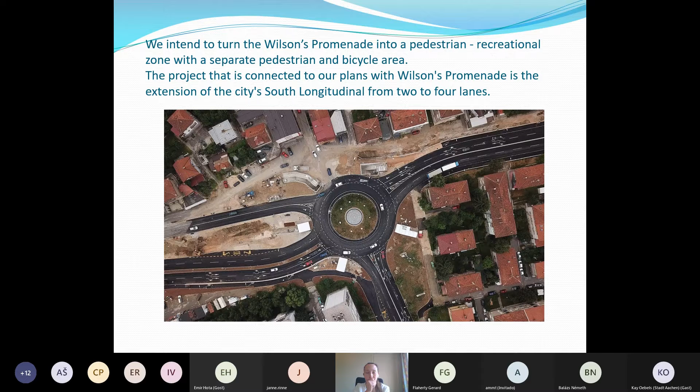We intend to close Wilson's Promenade completely for motor vehicles. The project connected to this plan is the extension of the city's south longitudinal from 2 to 4 lanes, which is already in construction. This project will allow us to completely close Wilson's Promenade, because the road is parallel to this longitudinal.

Trolleybus traffic takes place on this road, and we expect acceleration of public city transport in this part of the city. After completion of the expansion of the complete city longitudinal, we have another road reallocation planned, to establish a priority lane for public transport vehicles.

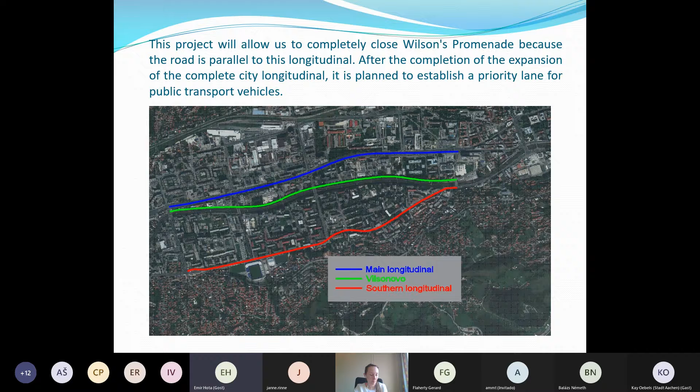We hope that very soon we will have the opportunity to present this important urban mobility project to other cities. This is all for me now. If you have a question, I will answer it. Thank you.

Thank you very much, Emir. Very, very interesting project. And I will now try again to go to Bratislava with Veronica.

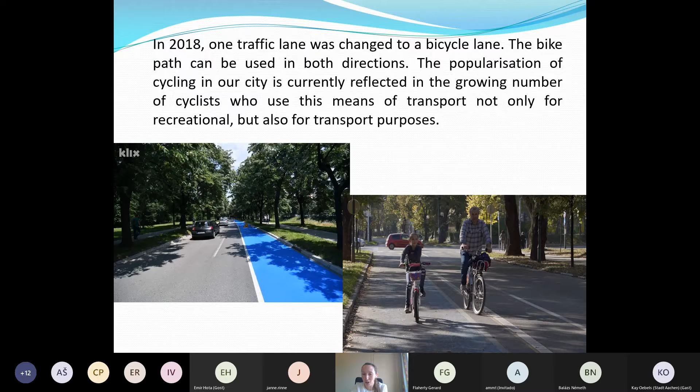Veronica, please unmute yourself. Then we will do a round of questions, and we would like to invite everyone in the room with us to share their story and experiences on road space reallocation from their city. But first, let me go to the beginning of the presentation. Veronica, can you unmute yourself? Can you hear us? Yes, I can hear you. Can you hear me well? Perfect, yes. Okay, I will go back to the beginning of the presentation and give you the floor. Could I then take control of the presentation? Yes, let me arrive at the beginning and then you can take control.

Okay, here you go. Okay, I will try to take control. So you have it? I have it, probably.

Perfect. Okay, so hello again. I am Veronika Vojteková, and I will present a project called Vivid Square, a project about transforming public space in the central part of Bratislava, next to the historical center.

This project began in the context of a neglected public space, because the city didn't have any long-term vision for how to change or develop public spaces in general. Usually their function was reduced to only a transition area.

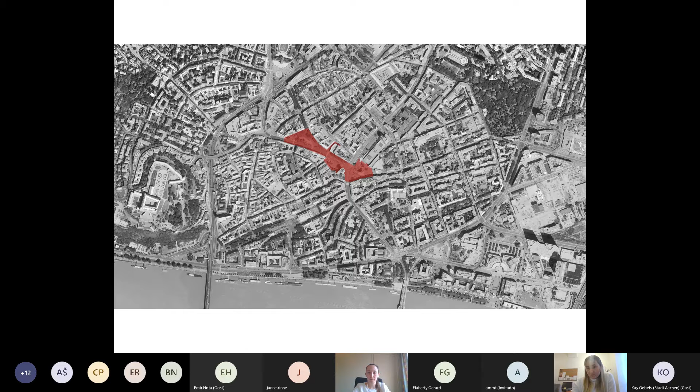So just for you to have an idea what I'm talking about, it's this space coming down here. In the past it was a marketplace, and the main problems we dealt with were uncontrolled parking, a lot of visual smog, and a lot of barriers in this area.

I also wanted to say that it's a very politically important place, because a lot of public gatherings or protests are held there many times.

This project has three main parts: first, data collection and analysis, which continues into quick wins—cheap, fast, and effective solutions which could help us improve the condition of the public space before the architectural competition could be realized or its result built.

What's also interesting about the project is that it starts in a bottom-up form. A group of activists started with this first part, and later, with the changing political situation in Bratislava in 2019, a new city organization called the Metropolitan Institute of Bratislava started, in which I am currently working, and we took leadership of these two parts.

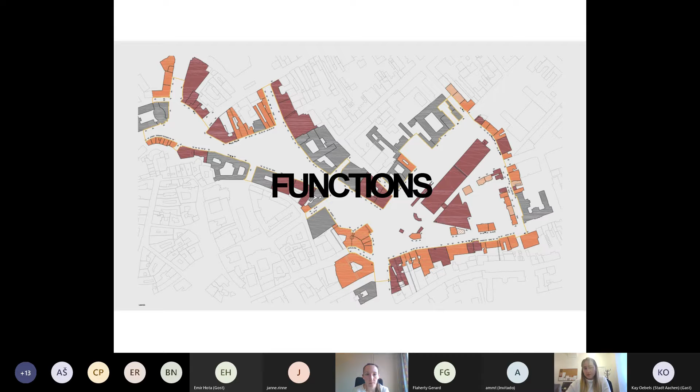So the first part is about collecting and analyzing data. We also carried out many different kinds of participation, and we looked at, for example, functions of buildings and their opening hours, mobility, public lighting, as well as different kinds and forms of participation.

It was also very important for us to understand the evolution of this area, so historical research was essential for us.

We also did many other different kinds of analysis. All of this data helped us create a better architectural assignment for the next competition, and also helped us spot the best areas or places where we wanted to apply quick wins.

Another important thing about quick wins is that they helped us keep the idea or topic of transforming this area alive until we could build the result of the competition.

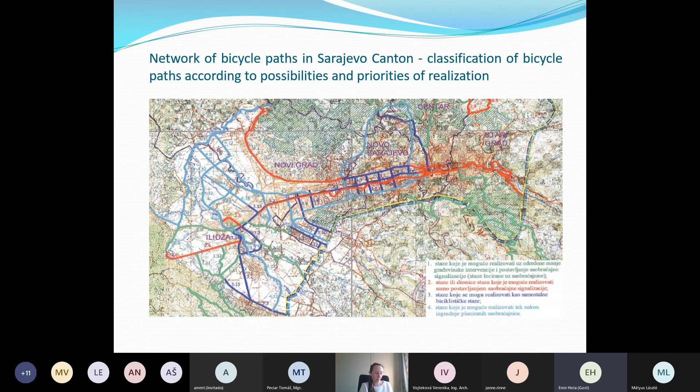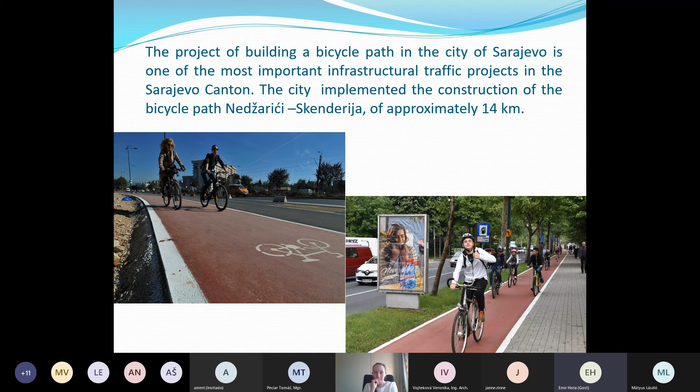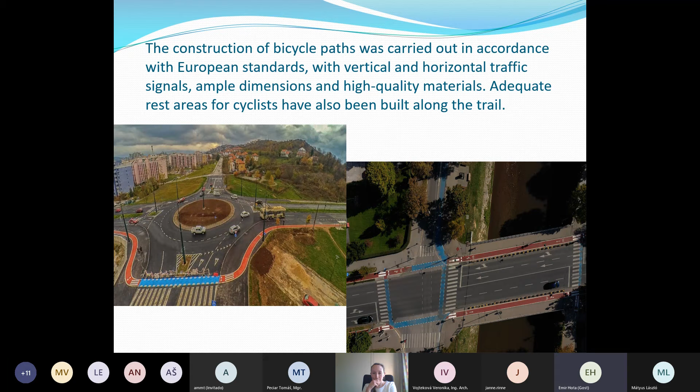Construction of the bicycle paths was carried out in accordance with European standards, with vertical and horizontal traffic signals. The popularization of cycling in our city is currently reflected in the growing number of cyclists who use this means of transport not only recreationally, but also for transport purposes.

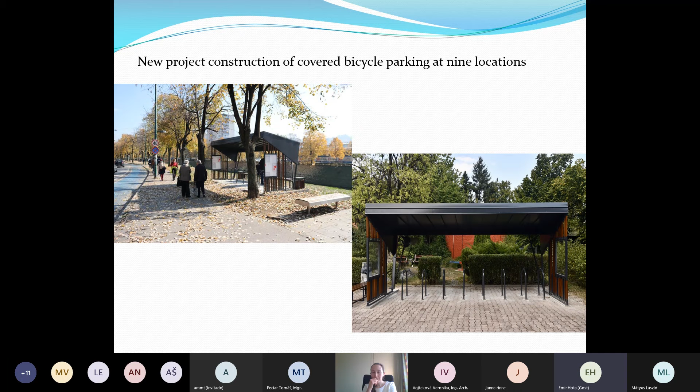This is our last project. We built covered bicycle parks in 9 locations in the city. We also have another project about improvement in the cycling infrastructure, bicycle racks and lockers for storing bicycle equipment in schools and universities, and similar projects.

Sharing bike project, e-scooter project, and rent-a-bike project are developed through private initiative. We also implemented a project of marking and signalization for 150 kilometers of mountain bike trails, and mapping 600 kilometers of cycling trails that will connect the Olympic mountains Bjelašnica, Igman, Jahorina, and Trebević.

And that's all. I hope that very soon we will have the opportunity to present this and many other important projects for urban mobility to other cities. Thank you very much.